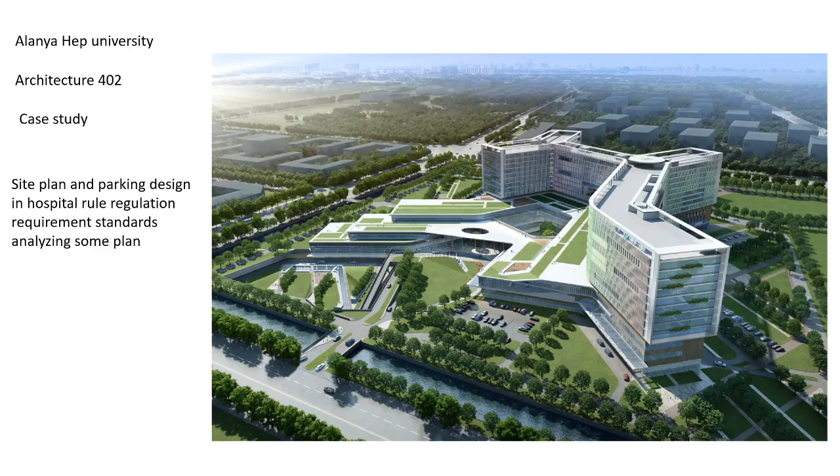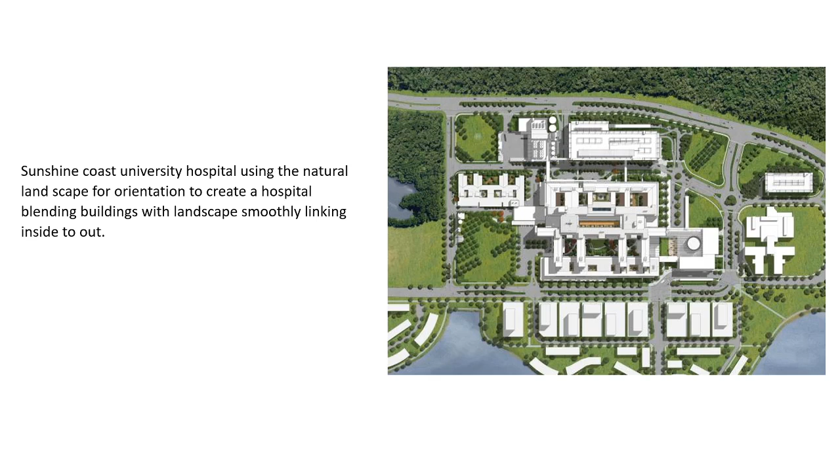During my research, I found one of the most successful hospitals which has been constructed in Australia. The name of this hospital is Sunshine Coast University Hospital. This hospital is famous for using the natural landscape for orientation to create a hospital, blending buildings with landscape and smoothly linking inside to out.

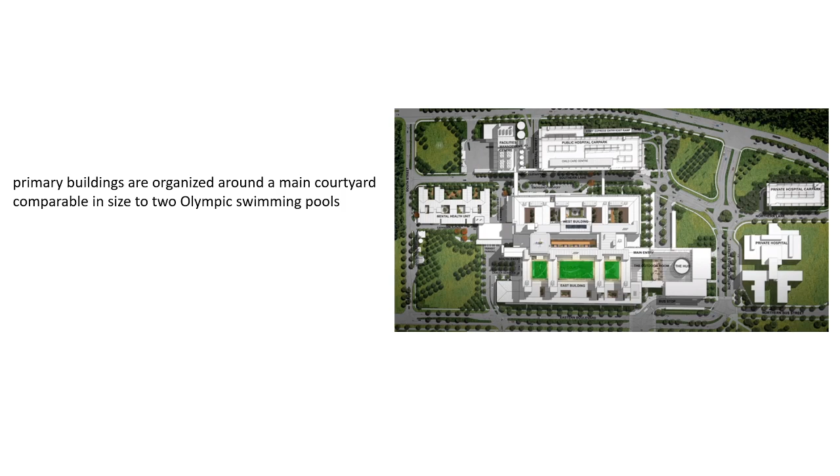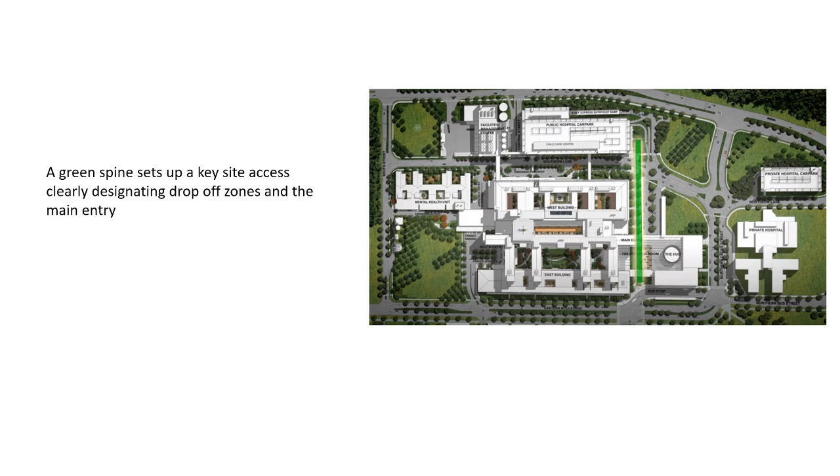The primary buildings are organized around a main courtyard comparable in size to two Olympic swimming pools. A green spine sets up a key site access, clearly designated drop-off zones and the main entry. Throughout all levels of the building, courtyards continue the integration of landscape. Light wells punctuate the hospital built form.

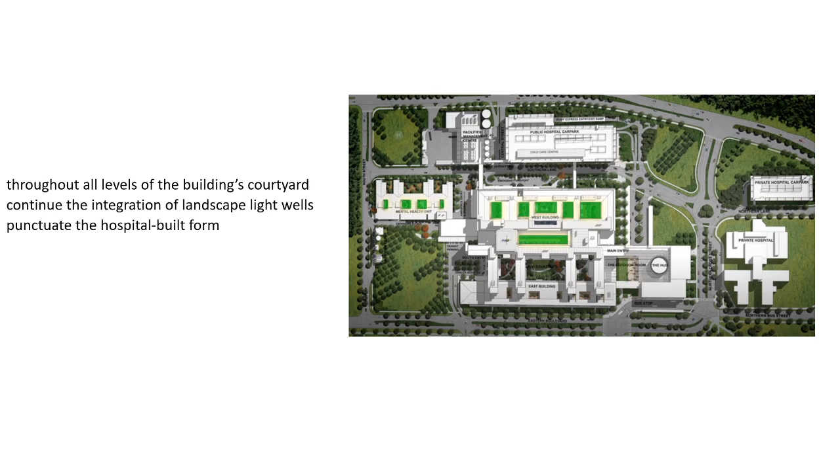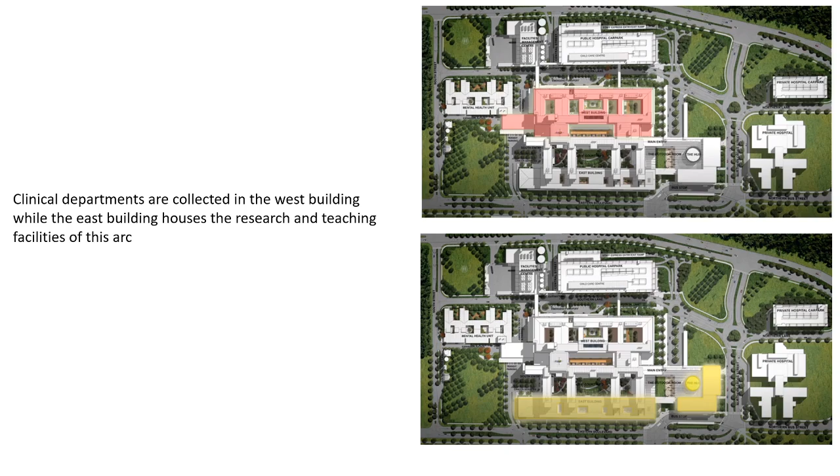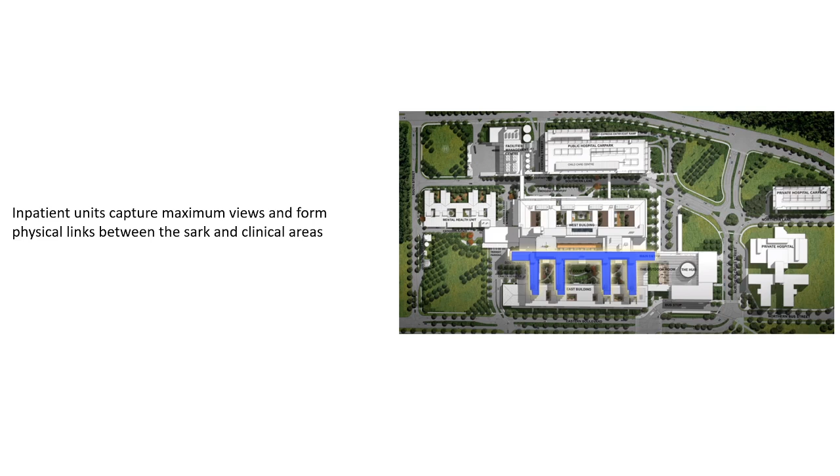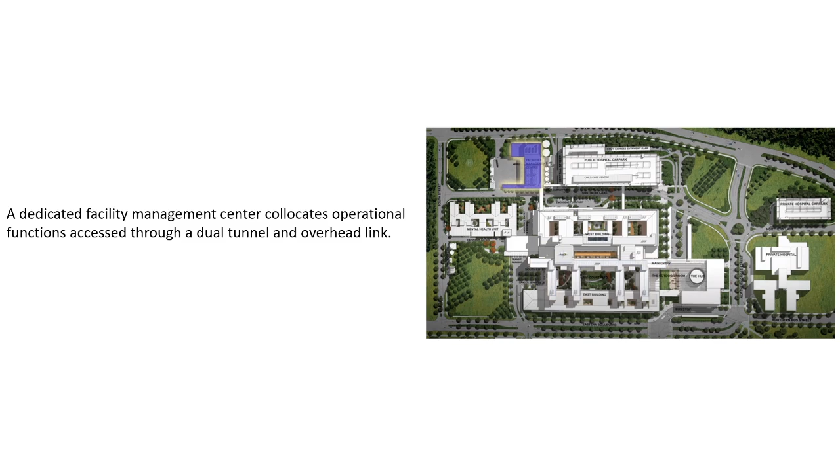Clinical departments are collected in the west building, while the east building houses the research and teaching facility of this arc. The mental health unit sits adjacent to the emergency department. Inpatient units capture maximum views and form physical links between the SARC and clinical areas. A dedicated facility management center collocates operational functions, accessed through a dual tunnel and overhead link.

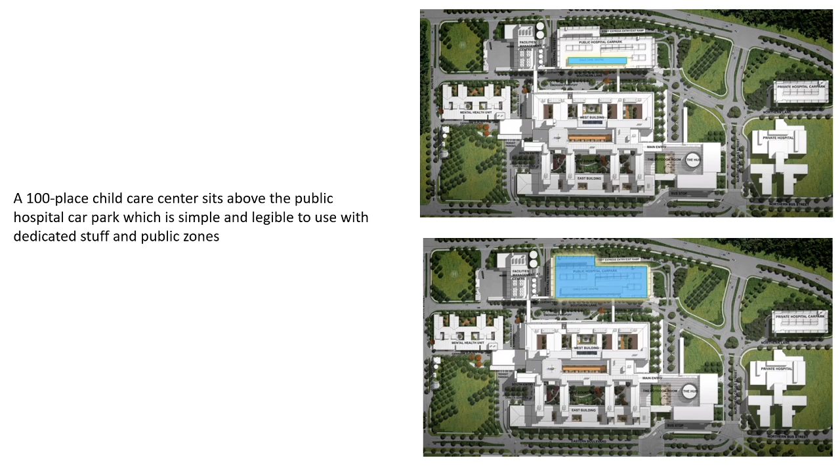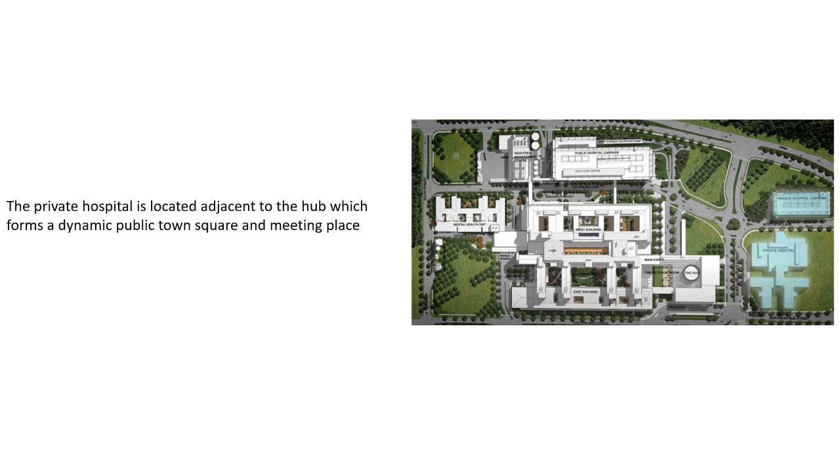A 100-place childcare center sits above the public hospital car park, which is simple and legible to use with dedicated staff and public zones. The private hospital is located adjacent to the hub, which forms a dynamic public town square and meeting place. The outdoor room uniquely reflects local lifestyle, a perfect space to meet, greet, and spend time together.

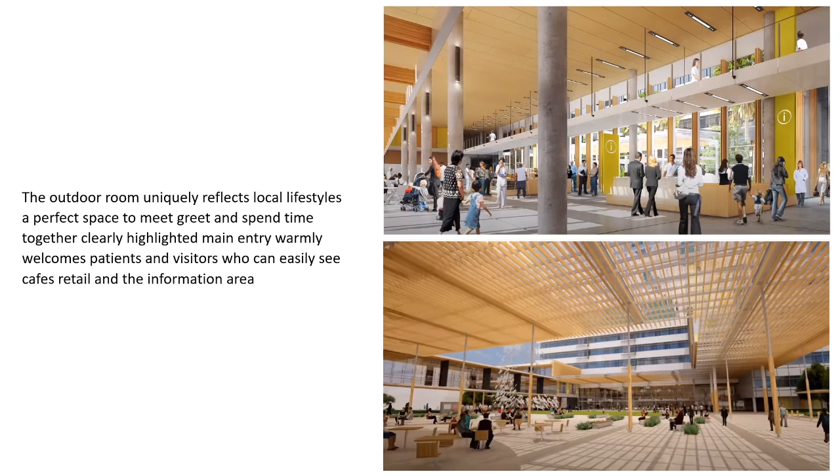The clearly highlighted main entry warmly welcomes patients and visitors, who can easily see cafes, retail, and the information area. The active hospital street opens out into the main courtyard, featuring eating, relaxing, and play areas. On the western edge, it provides a tranquil outlook for the cancer center. Pastoral care is located on the southern end of the main courtyard with specialized entries such as maternity and cancer care.

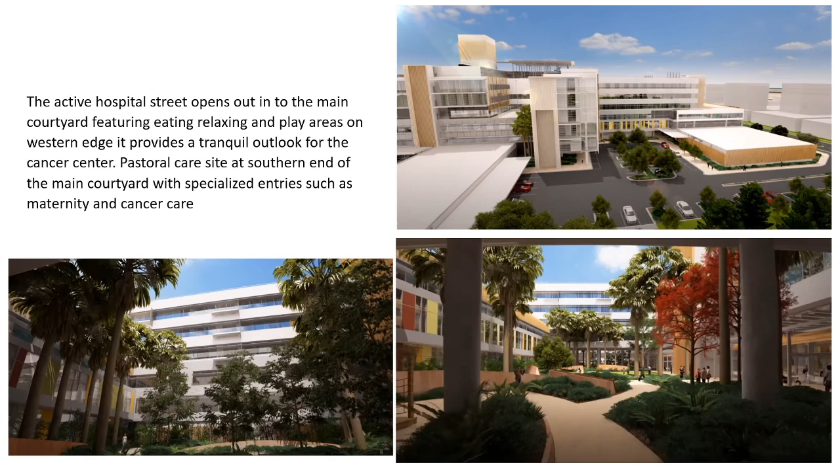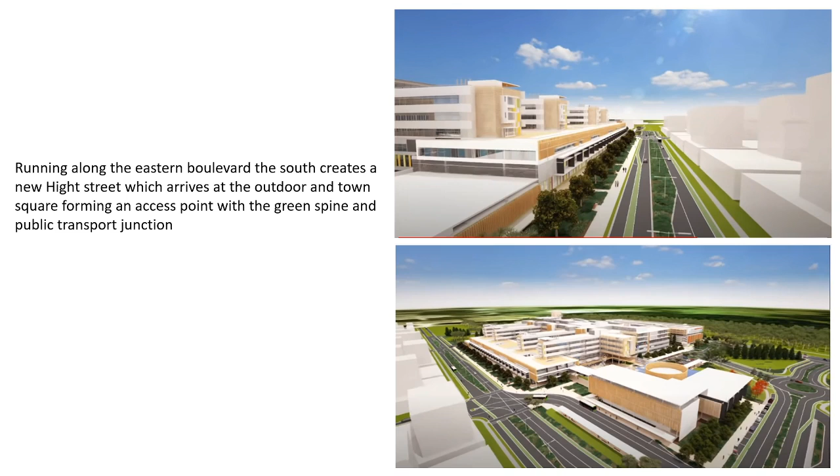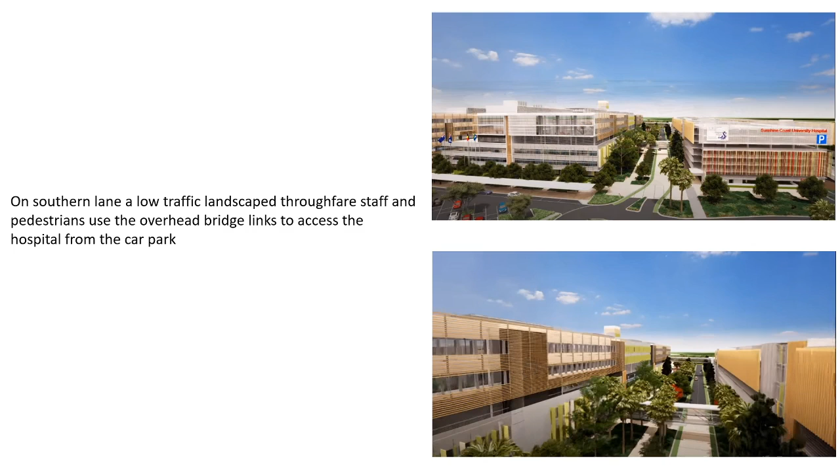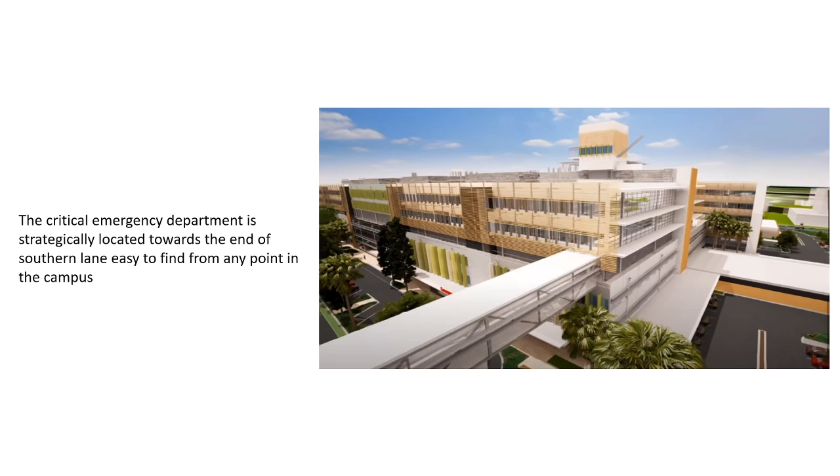Running along the eastern boulevard, the south creates a new high street which arrives at the outdoor and town square, forming an access point with the green spine and public transport junction. On the southern lane, a low-traffic landscaped thoroughfare, staff and pedestrians use the overhead bridge links to access the hospital from the car park. The critical emergency department is strategically located towards the end of the southern lane, easy to find from any point in the campus.

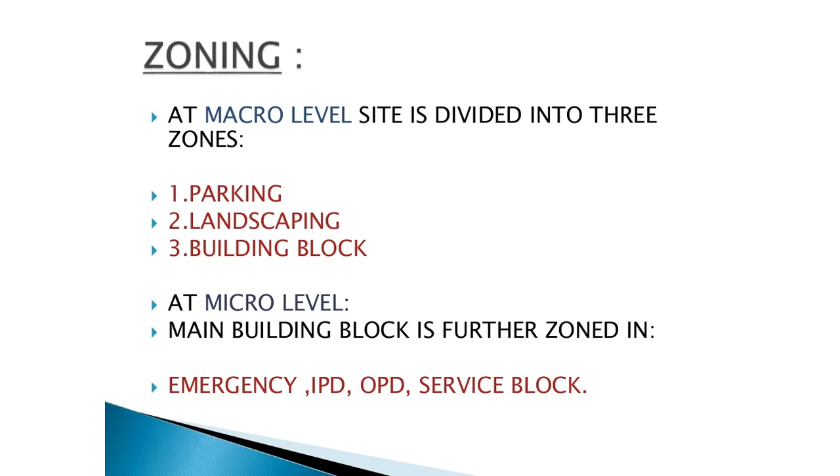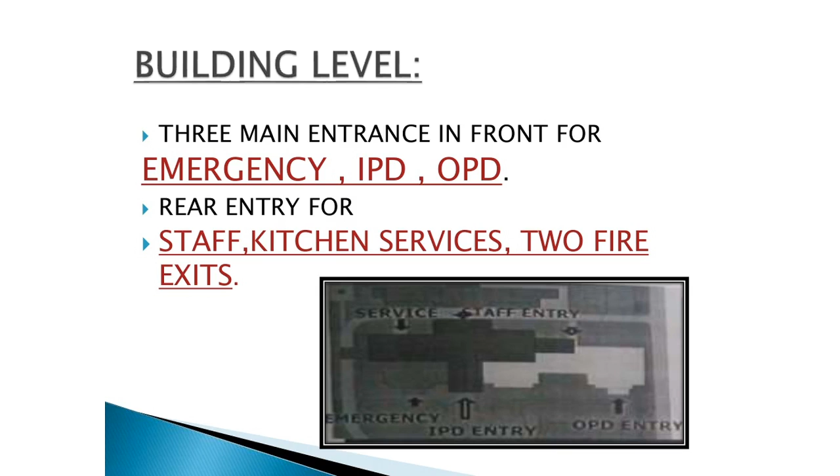And now I'm going to talk about one of the most important parts while we are designing a hospital, which includes three: parking, landscape, and building blocks. At the micro level, the main building block is zoned into emergency, IPD, OPD, and service block. There are three main entrances in front for emergency, IPD, and OPD, and there should be a rear entry for staff, kitchen and service, two fire exits.

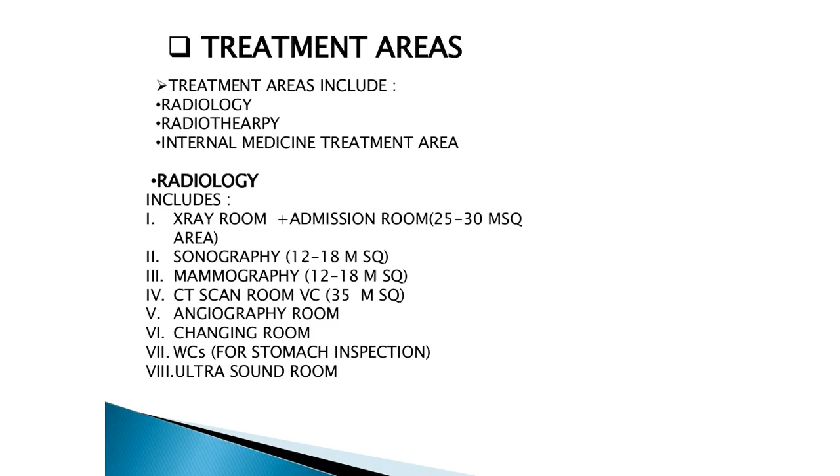Now, this is some information about the most important part of the hospital, which is radiology. Radiology includes X-ray rooms and an admission room that requires at least 25 to 30 square meters. Radiology also requires sonography, mammography, CT scan room, angiography room, changing room, restroom and ultrasound room.

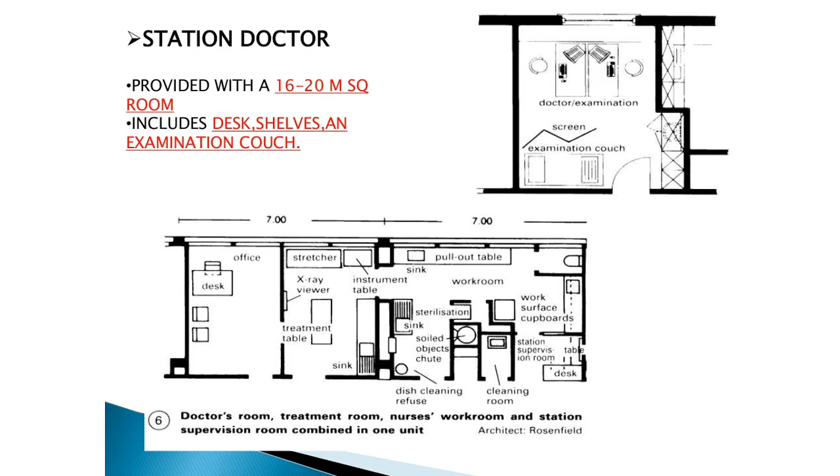The laboratory department's purpose is concerned mostly with the preparation and processing of blood, urine, and fecal samples. The location of the laboratory is separated from treatment and nursing areas. And the area requirement for the laboratory itself is a large room with a built-in workplace to offer a high level of flexibility.

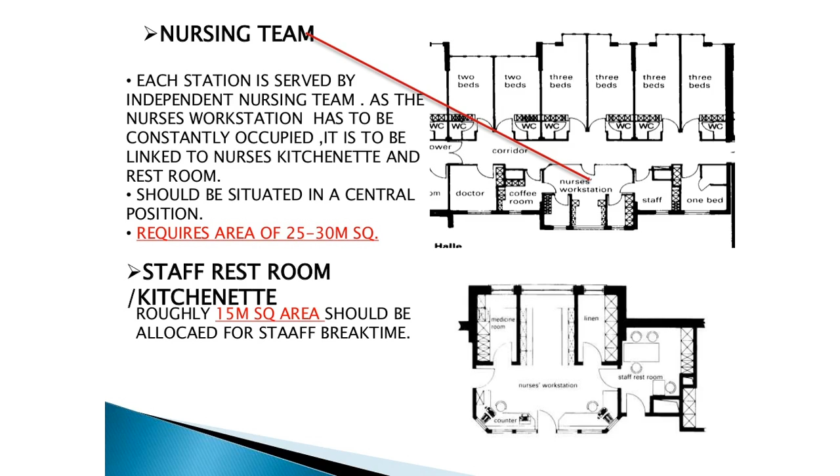Nursing team. For the nursing team, each station is served by an independent nursing team. As the nurse workstation has to be constantly occupied, it is to be linked to the nurse kitchen and restroom. It should be situated in a central position, and the area required is up to 25 to 30 square meters.

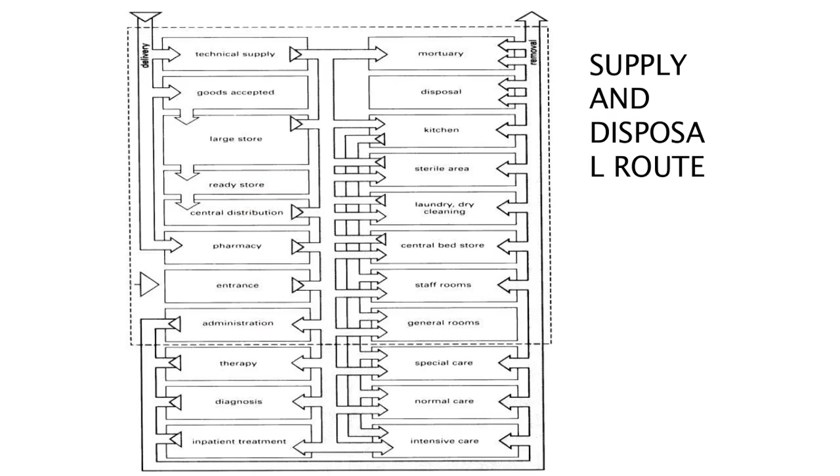The corridors and the circulation in a hospital are very important. If we want to design them, we should consider some requirements. It must be designed for the maximum expected circulation flow. A general access corridor must be at least 1.50 wide.

Corridors in which patients will be transported on trolleys should have a minimum effective width of 2.25 meters. Suspended ceilings in corridors may be installed up to 2.40 meters. The effective width of the corridor must not be constricted by projections, columns, or other building elements.

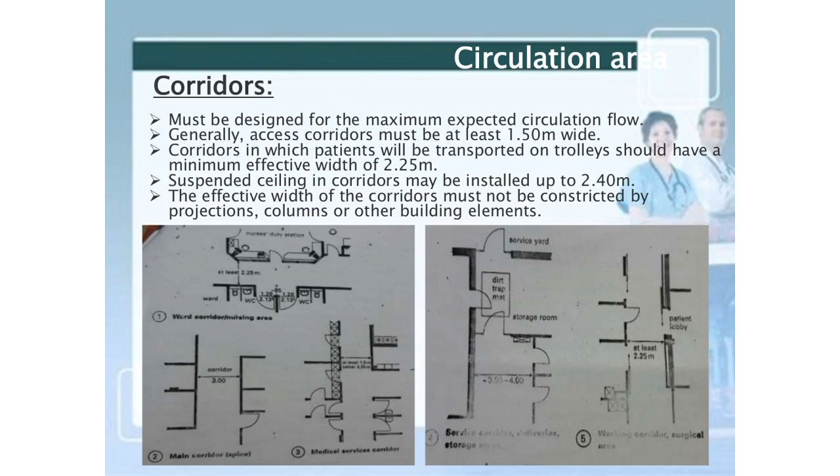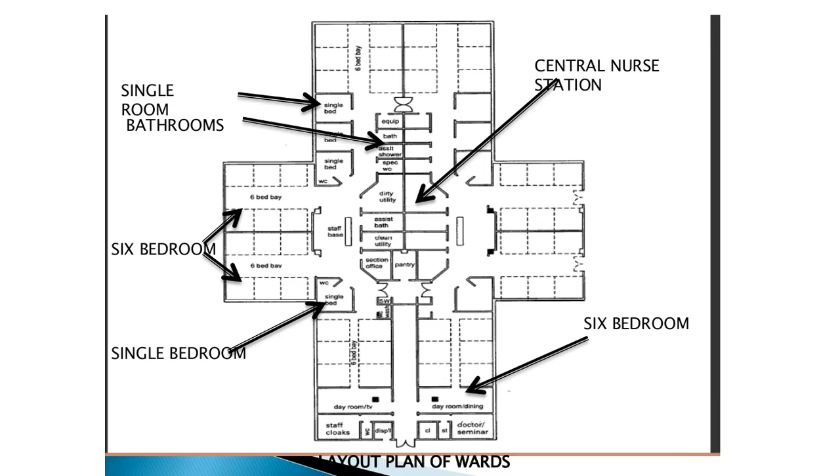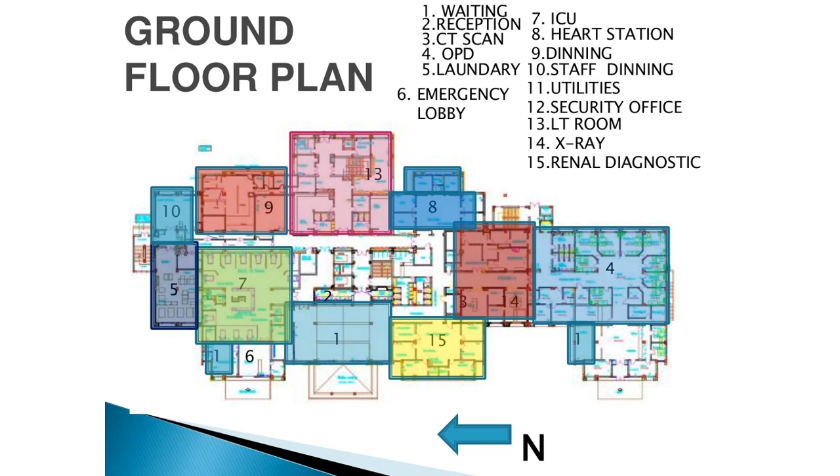And this is a ground floor plan that has been designed by one of the master's professors for a hospital. It should include waiting, reception, CT scan, OPD, laundry, emergency lobby, ICU, heart station, dining and staff dining, utilities, security office, LT room, X-ray, and renal diagnostic.

The circulation of a hospital is very important. It should have different entrances from different parts of the project. The main corridor of a hospital should have an average width of 10 meters at least. And it should have a main entrance, an emergency entry, a service entry, a doctor entry, and an OPD entry if we are going to have an OPD in our project.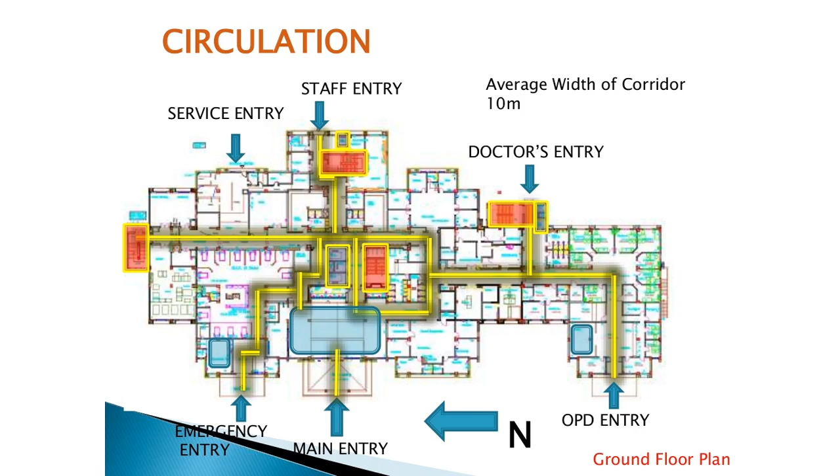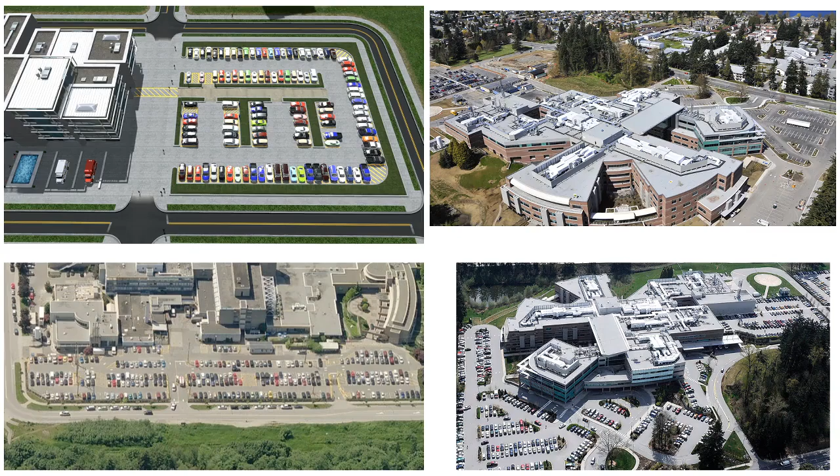And we have service core parking. It is provided for the service traffic and should be provided on the backside of the building for easy loading and unloading of goods. And this is an example of how we're going to design proper parking for a hospital. And these are some information about rules, distances, and circulation in a hospital.

This is a ramp. We have to follow some rules if we are going to have a basement for our project. The slope for the ramp should be around 20% at most, so the car can easily go up and come down. And the width of the slope and the street should be around 3.66 meters for each car.

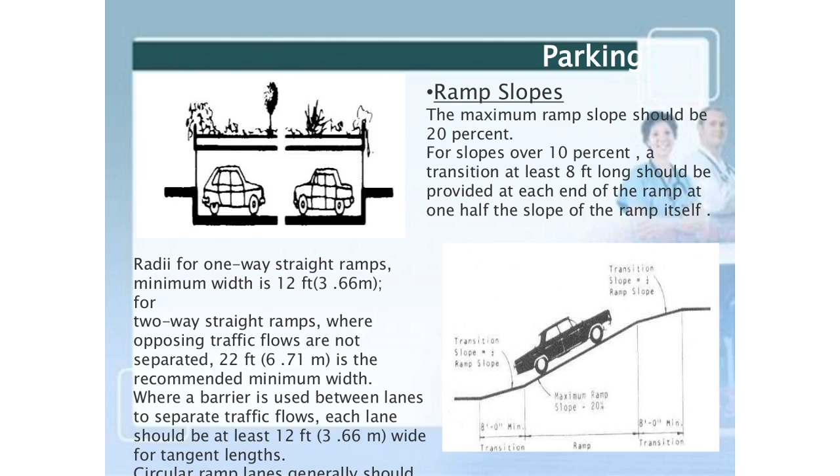And we have a circulation area for pedestrians and movement. Pedestrian space serves two functions: movement and circulation, and relaxation area. They must be busy and colorful, exciting and stimulating, and must make walking enjoyable. Sculptures and murals, as well as architecture, can be freestanding, structural, or a visual part of the overall scheme.